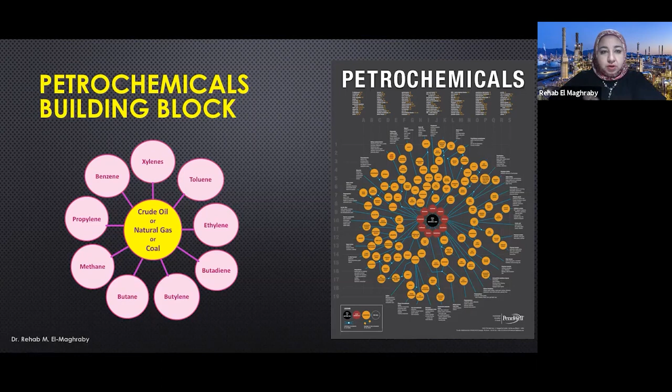So let's start first with natural gas. This will be the main focus - we will be talking about natural gas for 30 minutes or so, how to produce this natural gas, how to clean this natural gas, and reach the purity that is required for the petrochemical industry. Natural gas has two types: associated gas and non-associated gas.

Associated gas in the reservoir - you know that natural gas can be co-produced with crude oil. So a reservoir can contain crude oil and natural gas, and also there can be some reservoirs with only natural gas alone, which is the non-associated natural gas type. The main component in natural gas is methane, but there are other gases coming out with the methane, like ethane, propane, butane, up to C7 - we can say up to C7 will be heptane.

If this is non-associated gas - looking at natural gas, of course the composition differentiates with the change in the field. Not every field has the same composition of natural gas; there is different composition according to the field that is produced. Also, if this is non-associated gas, it is different than if it is associated gas.

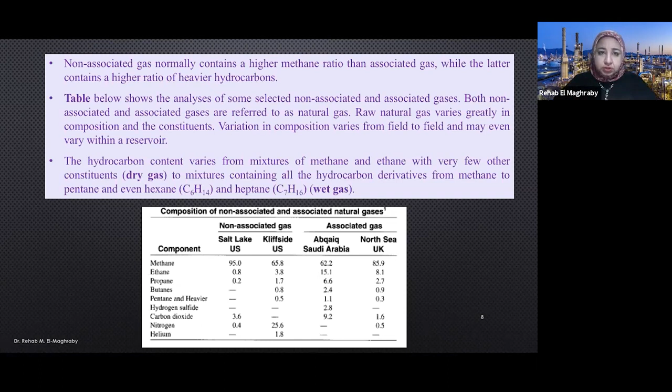As a general rule, the composition of natural gas is not constant. It differs from one field to another, and also depends on whether it is associated gas with crude oil production, which has higher molecular weight components, or non-associated gas, which has a higher composition of lighter components such as methane.

There are also other non-hydrocarbon components, like H2S (hydrogen sulfide) and carbon dioxide. We have nitrogen, helium, and sometimes mercury, which is not welcomed at all in natural gas, along with heavier components.

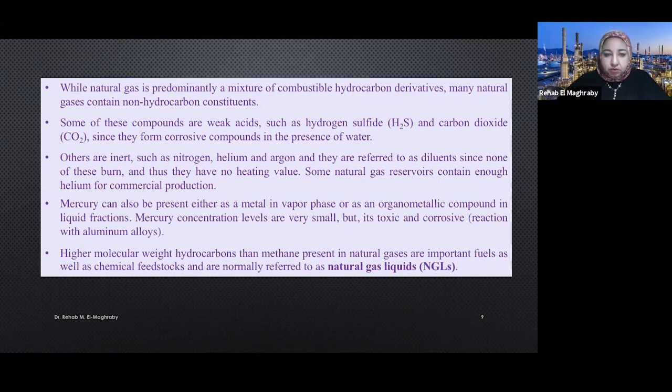The natural gas has to meet certain standards to be pumped, because it has to be cleaned. You don't want your pipeline to be damaged due to corrosion and pitting, hydrates, from hydrocarbon and non-hydrocarbon components.

Also, for the calorific value, you want to adjust the natural gas to be mainly methane, because nitrogen and carbon dioxide have zero calorific value.

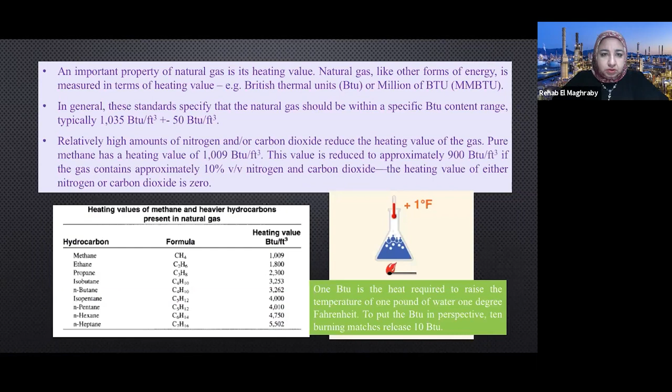So for the natural gas cleaning options: once you produce your natural gas, you first have to separate it from water using gravity. Then there is acid gas removal, dehydration (removal of water), mercury removal, nitrogen rejection (nitrogen removal), natural gas liquid recovery, fractionation, and sweetening. We will go step by step through the process of natural gas cleaning.

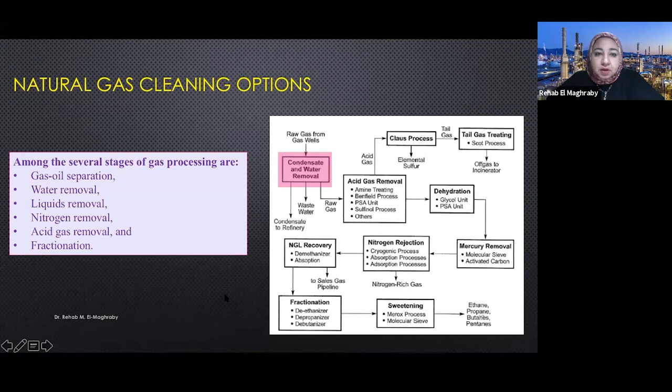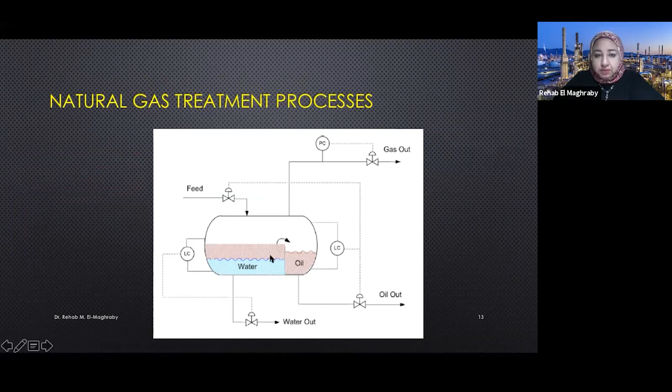The first step is to remove the water. If the gas is associated gas, you have oil, water, and gases, so this is a three-phase separator: you separate the water, and separate oil and gas from the top. If it is non-associated gas, there will be no oil, and this will be a two-phase separator, with only water and gas from the top. The next step after removing water using the difference in gravity is to remove acid gas.

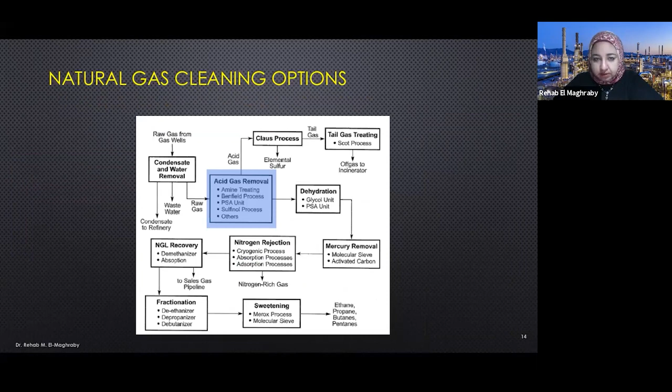In general, acid gas means H2S and carbon dioxide. In this case, we call this gas sour gas. Once you remove this acid gas, the natural gas becomes sweet gas.

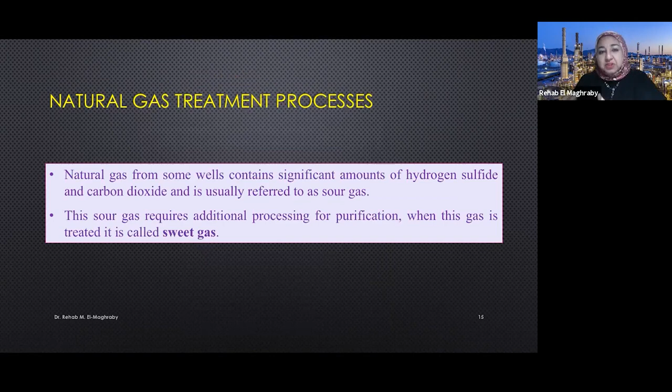So why do you want to separate the H2S? Because H2S mainly causes corrosion. Acid gas will react and cause degradation of your pipeline, and you don't want to damage your pipeline.

Also, H2S contains sulfur. If the natural gas enters the refinery or petrochemical plant containing H2S, it will damage your catalyst, so you don't want to have H2S in your natural gas.

Sulfur also reacts - if you burn this natural gas containing H2S, you will get SO2. The emission of SO2 will give you acid rain. So this is another reason why you want to remove H2S.

CO2 also is not welcomed at all in the natural gas. Why do we want to remove CO2 from the natural gas? CO2 causes corrosion, and it has zero calorific value, so it has no cost. It will actually reduce the selling price of your natural gas, because the selling price depends on the calorific value of the natural gas.

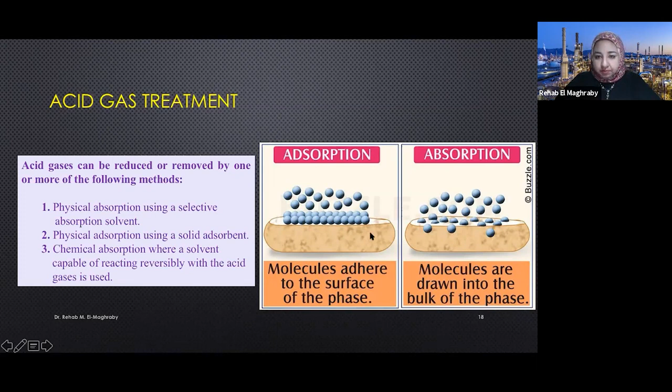So how is this acid gas removed? There are three known processes used to remove acid gas: physical absorption, physical adsorption, and chemical absorption. Absorption is where the gas is dissolved inside the liquid or solvent you have. In physical adsorption, you are using a solid material and the gas will be on the top. For acid gas treatment using physical absorption, there is no chemical reaction involved.

Physical absorption involves no chemical reaction. In this case, the solvent will be dimethyl ether of polyethylene glycol. This is one of the processes or solvents used for physical absorption, where no chemical reaction occurs between the acid gas and the solvent.

To illustrate this flow sheet quickly, if you are using a solvent, you have at least two towers: one is the absorber, the other is for regeneration, because you want to regenerate this solvent. So there's the absorber tower and the regeneration tower, with other serving facilities in between.

Your sour gas is introduced from the bottom of the absorber tower, where the solvent extracts all the sour gases from the natural gas. You inject sour gas and get sweet gas from the top, without H2S or CO2. The solvent is introduced from the top and flows in contact with the sour gas, so the gas is cleaned while the solvent becomes a rich solvent containing H2S and CO2.

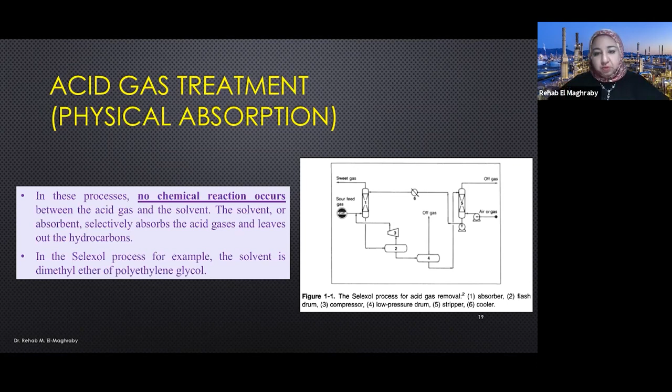The pores have a throat, like any rock structure. Zeolite is actually a natural material, though sometimes it's synthetic, depending on the type. The molecular sieve or zeolite contains pores with a certain throat size that allows only molecules of a certain size to pass through; larger molecules cannot enter the pore.

As the gas passes through, it contains H2S and CO2, which are smaller size molecules compared to methane. So CO2 and H2S will go inside these pores, while methane will not be able to enter and will pass through without being captured by the molecular sieve.

You introduce hot air for regeneration, to remove the CO2 and H2S. After a certain time, there will be no more capturing because the pores are filled with H2S and CO2, with no free space left. So you have to stop the process and do a regeneration cycle, using hot air or steam to heat up the molecular sieve so the air replaces the CO2 and H2S.

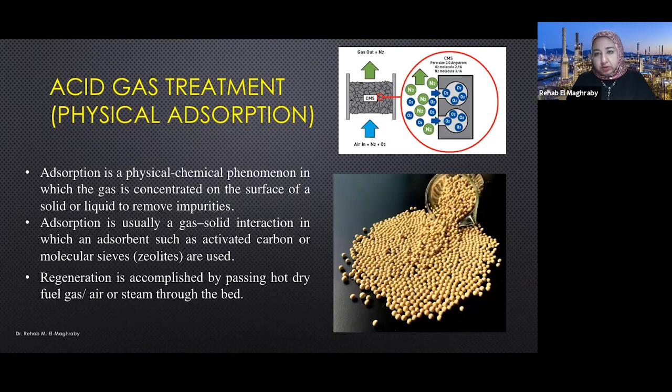So the third process is chemical absorption. This is actually the normal case used in many gas reservoirs or for surface facilities for natural gas.

So in this case, you have to remove CO2 and H2S using solvent. This solvent is amine based, like monoethanolamine, diethanolamine, diisopropanolamine, diglycolamine. So it is actually based on amine solution.

This amine solution undergoes chemical reaction. The amine reacts with H2S and forms sulfide, and for the CO2 it forms carbonates. This bond is easy to break. So for the choice of your solvent, it has to carry on reaction with the CO2 and H2S, but this bond between the sulfur and the amine could be easily broken, so we can regenerate the solvent again and use it again.

We don't want to waste your solvent, because if the reaction is permanent, as we will see in NaOH. If you are using caustic soda or NaOH, the reaction will be permanent, so you have to use fresh solvent each time. This will not be economic. So when you choose your solvent, you have to choose one that can be easily regenerated and used back again in the process. This is the process of chemical absorption.

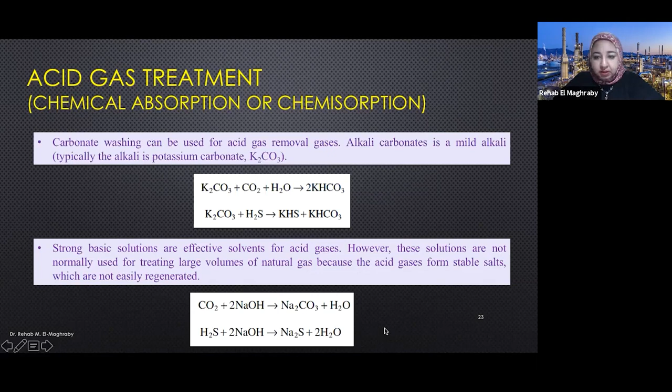Caustic soda or NaOH also reacts with CO2 and H2S and could be used, but it is a permanent reaction. The carbonate and sulfide of the sodium is permanent, non-reversible, so it is not easily regenerated. You are wasting the NaOH, so it is not recommended to use.

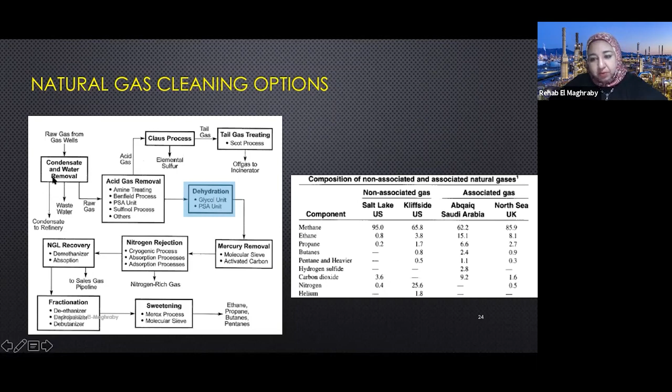So now we have our natural gas free from acid gas. The next step is to conduct dehydration, which means we have to remove the water from the natural gas. Why would we like to remove water from natural gas? Didn't we already remove it here? No, because that was just using gravitational force to separate water from gas. In this case, we want to reach a part per million concentration of water, which is not achievable by this way of separation. So we conduct dehydration.

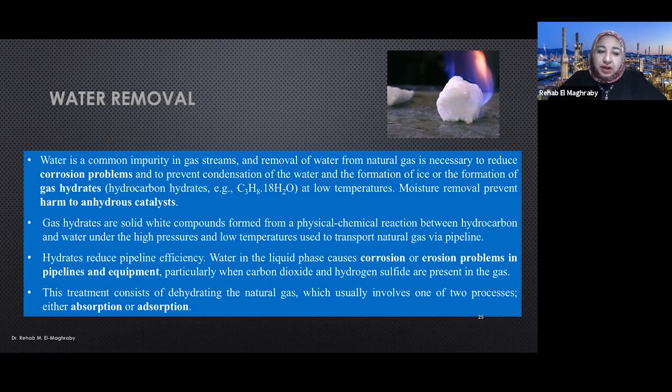So for this flow sheet, this is a flow sheet of extraction of water from the natural gas using glycol.

For solvent extraction, we have two towers: absorption tower and regeneration tower. In the absorption tower, wet gas containing water is introduced from the bottom, and after meeting with the glycol, the glycol extracts the water from the natural gas, giving us dry gas. The introduced glycol is lean at the top, and after extraction of water, it becomes rich glycol, which is then introduced to the regeneration tower.

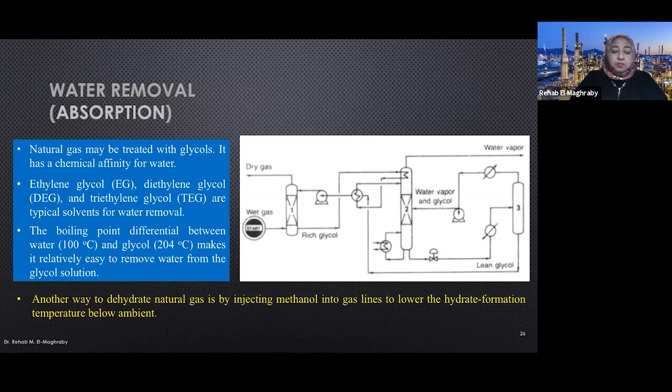For adsorption, we are using solid molecular sieve. The water molecule is small enough to fit inside the pores of this molecular sieve. The molecular sieve contains pores, and if we look at the sizes, methane is larger, N2 and O2 are smaller, and H2O is smaller.

So H2O can go inside the throat of the molecular sieve and be captured inside, along with CO2 and H2S. The methane cannot go inside the molecular sieve, and it will go from the top of the tower or from the bottom, whatever way you are injecting the gas.

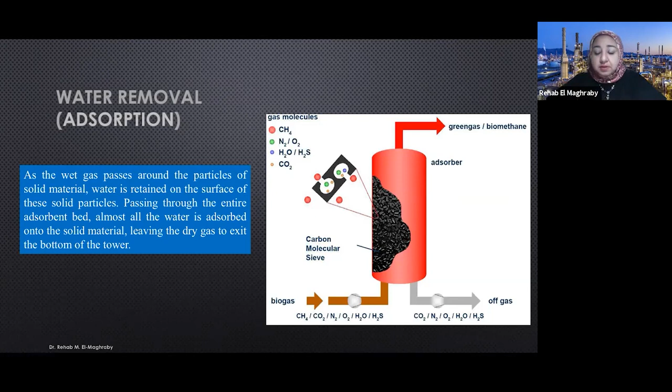So back again here, this is the flow sheet of adsorption using molecular sieve, so we can extract water from the gas. You can see here that there are...

Two extraction towers. They work alternatively. So once one is filled with H2O or water, it will be closed and the other one will be used. So one is in the regeneration phase while the other is in the adsorption phase.

Let's follow the blue line here. We have the wet gas introduced to the molecular sieve, introduced from the top in this case. The H2O is captured inside the molecular sieve, and the dry gas comes from the bottom.

After it is filled with H2O, no more H2O can go inside the molecular sieve since the pores are filled with water. It will be closed, and we will start the regeneration step, which in this case is the red line.

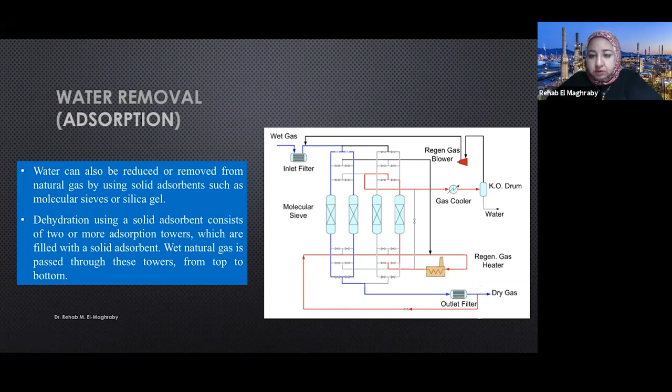So let's see, we take some dry gas here, it is heated, then introduced to the molecular sieve or the adsorption tower, and it comes out as water and dry gas from the top. You have to separate the water in this tower, and the dry gas is compressed and injected again with the wet gas.

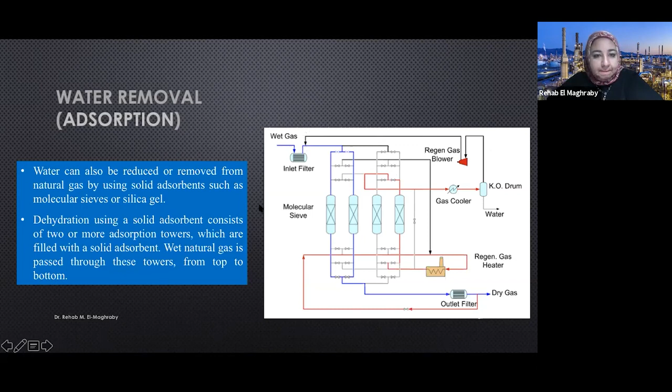The other step here: after we separate the gas from the water, after acid gas removal, after dehydration, we've dried our gas, we have to remove the mercury if the concentration of mercury is high.

We can do mercury removal using molecular sieve or activated carbon. Mercury actually causes corrosion to the brazed aluminum heat exchanger, which can cause environmental and safety hazards, so it's not allowed. Mercury also causes catalyst poisoning, so mercury is not welcomed as a material or component in natural gas. Two methods can be used to remove the mercury: non-regenerative mercury sorption or regenerative mercury adsorption.

For the non-regenerative method, you expect the material to be damaged. You cannot use material that will be damaged again; it cannot be regenerated.

For regenerative mercury removal, you use a molecular sieve which can be regenerated back using hot gas. I will not go into more detail on mercury removal, but you have to know that mercury can be removed using two methods: non-regenerative mercury sorbent, where the sorbent will be damaged forever and the surface cannot be regenerated or used again.

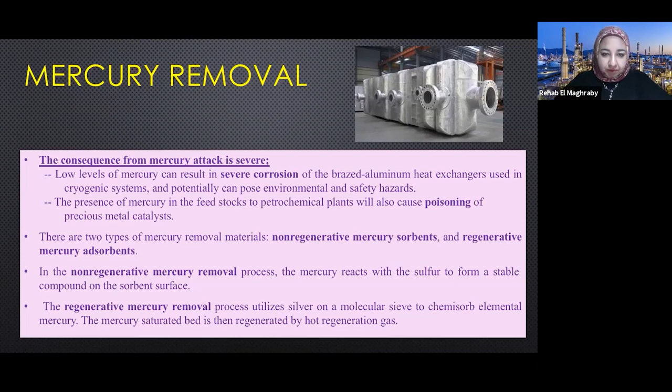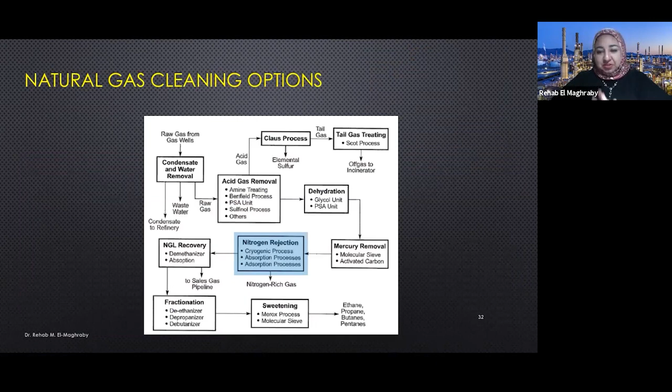For the next step, after we remove the mercury, we have to clean this natural gas from the nitrogen. If it contains nitrogen, nitrogen has zero calorific value. If you have a huge amount of nitrogen, or the composition of nitrogen in your natural gas is high, it will reduce the calorific value of your methane or natural gas, so it will affect the selling price of this natural gas.

Also, if nitrogen is contained in the natural gas, at the end you can have NOx, which is not environmentally friendly and can affect the ozone layer. So we have to separate nitrogen.

Nitrogen can be separated using two ways: cryogenic process and pressure swing adsorption. The cryogenic process uses the difference in boiling point between methane and nitrogen. Methane has a boiling point of minus 161, and nitrogen is minus 195.

Using very low temperature and high pressure, we will find that the methane will be liquefied and the nitrogen will be in the gas phase. So you can separate the nitrogen from the methane using the cryogenic process.

In pressure swing adsorption, it's like a molecular sieve. You will end up having nitrogen captured inside the pores of this molecular sieve, while the methane is not captured. So the nitrogen can be separated from the methane this way.

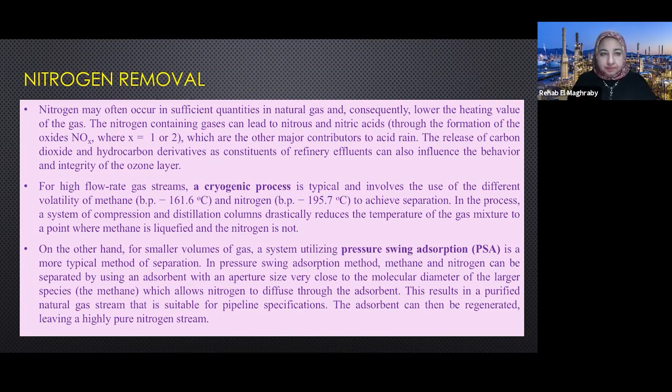This is about nitrogen removal. Again, the process you use depends on whether the natural gas has nitrogen inside; if not, you don't have to do the nitrogen removal step. So the natural gas cleaning options are according to the composition of the natural gas. If the natural gas contains no mercury, you don't have to remove mercury or use that step.

The next step is to separate the methane from the other natural gas liquids. Methane is what we mean when we say natural gas, like the natural gas used in the stove for cooking or in a furnace in industry. When you say natural gas, you mean methane, so you have to separate the methane from the other gases.

It is important, because the other gases are important for the petrochemical industry: ethane, propane, butane. Methane is also important for the petrochemical industry itself; from methane it can be converted to syngas, methanol, formaldehyde, and so on.

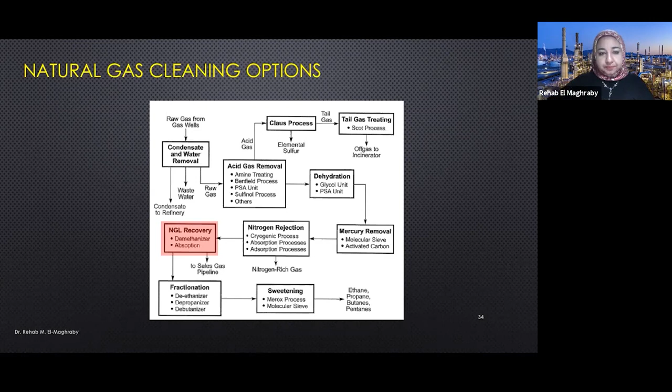So in this step, you have to separate the methane from the natural gas liquid; this is called the demethanizer. How can we separate this methane from the natural gas liquid? Using the absorption method or the cryogenic expander process.

So what you have is a gas under pressure, and then you allow this gas to expand without losing heat to the surrounding. This is called cryogenic expansion. What you will end up with is that the temperature of this gas will be reduced. This principle is used in what's called adiabatic expansion, and we use this process to reduce the temperature of the natural gas.

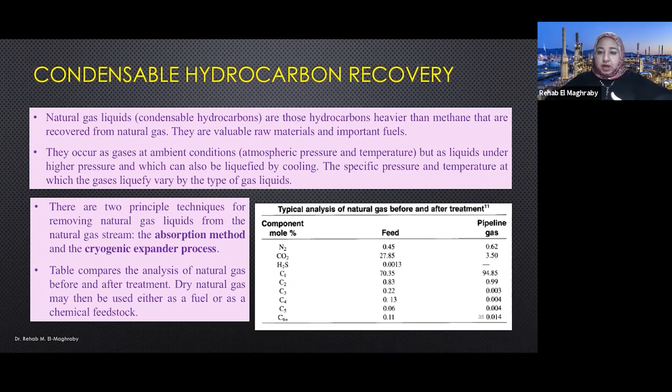Once you reduce the temperature, the natural gas liquid will be in the liquid state, and the methane will be in the gas phase. So we can separate them from each other.

Of course, we don't want to have water in this case. If you have water with the natural gas, it will form hydrates, and we don't want this hydrate in this process.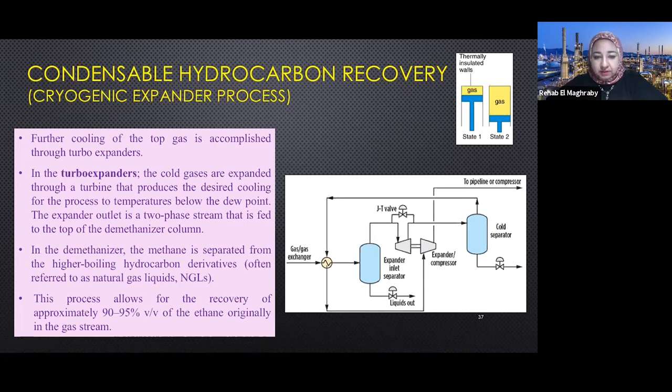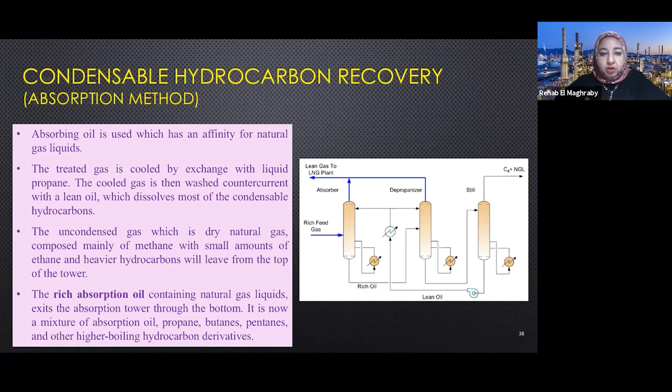From the top of the absorption tower, we have the natural gas, which is mainly methane, with a slightly small amount of natural gas liquid.

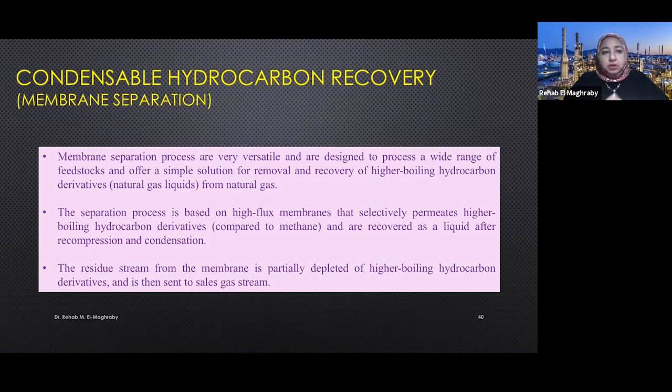There's also membrane separation. You can separate methane from natural gas liquid using a membrane. This membrane separation technology is actually used in Egypt to separate acid gas such as CO2 from natural gas. I didn't discuss it in the acid gas separation section, but membrane separation is one of the methods that can be used to remove acid gas, and it can also be used to remove methane from the natural gas liquid.

After you separate the methane from the natural gas liquid, you compress this methane and transport it globally. It has to be liquefied - liquefied natural gas (LNG). So it is methane compressed and cooled at very low temperature and high pressure, and transported using trucks and ships especially equipped for liquefied natural gas transportation.

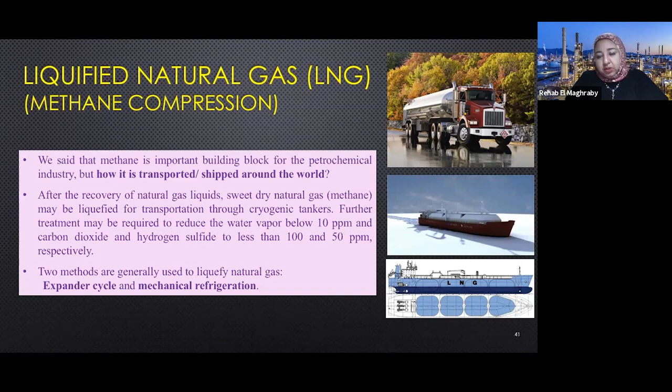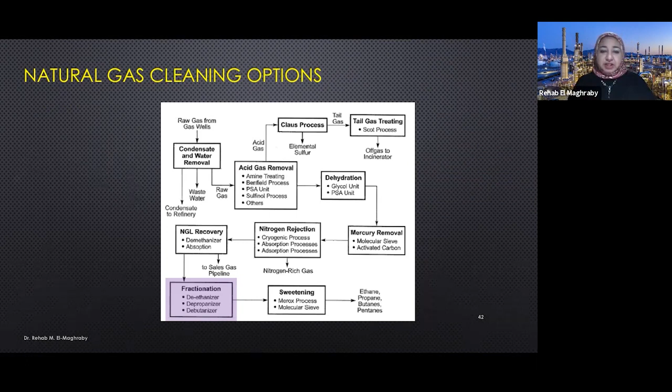So we have separated the methane. We have natural gas liquid together, which is ethane, propane, butane, and pentane. We have to separate these from each other. Each one of these is valuable for the petrochemical industry, but combined it is not valuable. So you have to separate this fraction, or natural gas liquid, from each other using the fractionation process.

So the first step, the gas here, according to the flow - let's discuss the flow sheet directly. The gas here is introduced, containing ethane, propane, butane, and pentane plus, meaning C5 and higher components. This gas is methane-free, doesn't contain any methane.

From the first fractionation tower, called the de-ethanizer, ethane is separated from the top, and the rest of the natural gas liquid is introduced to the next fractionation tower. Now free from ethane, it's introduced to the depropanizer. Propane is produced from the top, and the other components, C4 and C5 plus, are produced from the bottom. Then it enters another fractionation tower where butane is separated from C5 plus.

C5 plus, in most cases, is called natural gasoline. This is also important for the petrochemical industry, so natural gasoline is produced from the bottom.

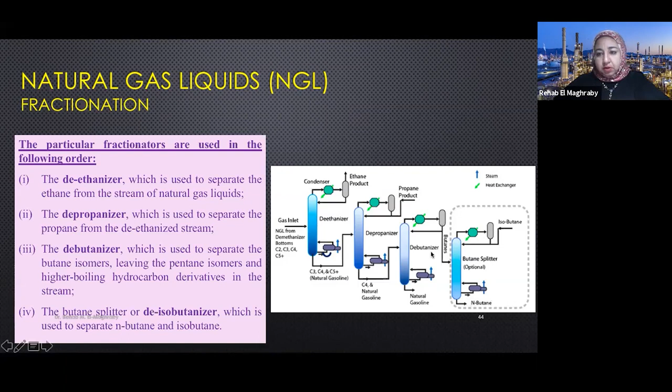For the C4, we have two C4 components - we don't have isopropane, but the first isomers we have are normal butane and isobutane. So the butane mixture is introduced to a butane splitter, separating isobutane and normal butane. It depends on the composition of iso and normal butane whether you will use a butane splitter.

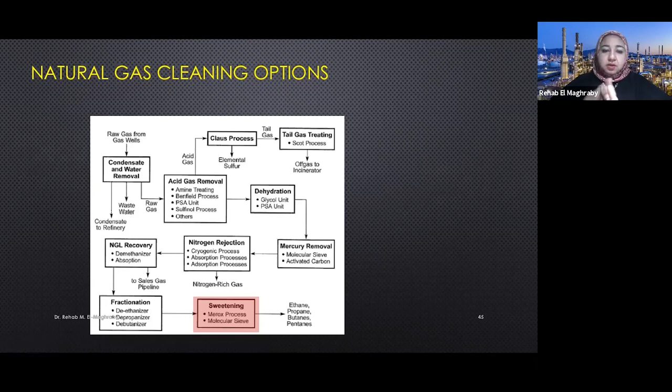The last step for natural gas cleaning is the sweetening. You have to clean your natural gas from mercaptan. We use ammonia or NaOH in this case. The ammonia and NaOH will react with mercaptan, which is RSH. The caustic solution will react with mercaptan and produce disulfides. The disulfides are insoluble.

Sometimes a catalyst is used with NaOH or ammonia, and it is called the Merox process. If the concentration of mercaptan in your natural gas is high, you have to do the Merox process, or mercaptan removal process. In this case, the H2S-free phase only contains mercaptan.

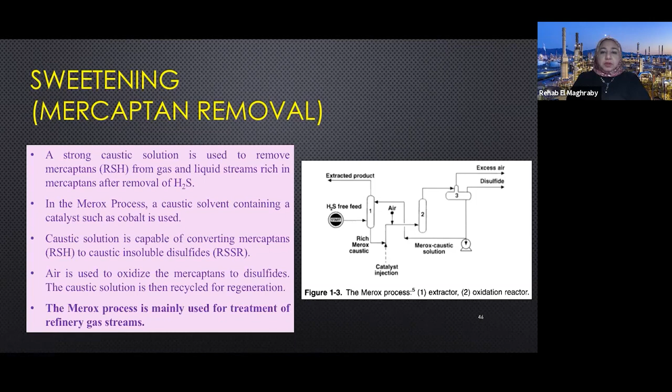Elemental sulfur can be used in many applications, like battery manufacturing, electrodes, and in the petrochemical industry for rubber production and so on.

Now we have methane as a product, and then ethane separately, propane separately, butane separately, and pentane as a separate process. All these natural gas components are valuable in the petrochemical industry.

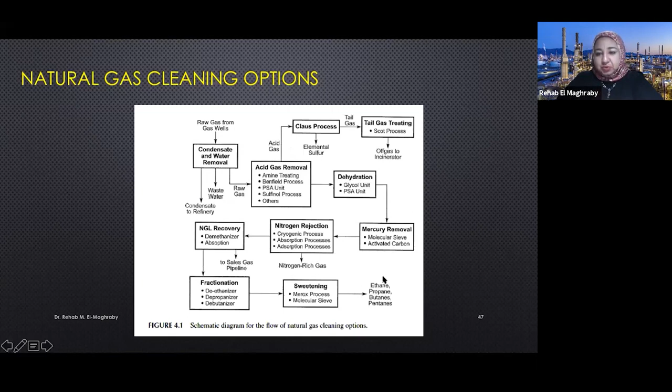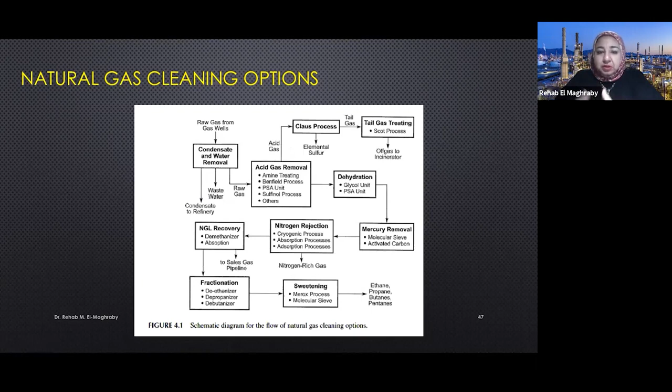In the latest lecture, we will see what chemicals can be produced from each of these components, why these components are valuable, and what petrochemical materials can be produced using this building block, or using these raw materials.

The other gas source is the refinery gas. We also have the crude oil as a source. So we have refinery gas as a source for petrochemicals, and we have crude oil as a source of petrochemical-based material.

We also have ethane produced, and ethylene, propylene produced from the refinery in catalytic cracking, which is also important for the petrochemical industry.

We have naphtha, or the gas oil—sorry, gasoline, naphtha. If you know, it's commonly known; this is the benzene you put in your car, not the benzene ring. It's commonly known in Egypt as benzene.

So the gasoline is actually an important feedstock for the petrochemical industry, because gasoline is a source for olefins if you are using steam cracking. The gasoline can be steam cracked to olefins, and benzene, toluene, xylene, which are important building blocks for the petrochemical industry. Gas oil can also be used as a feedstock.

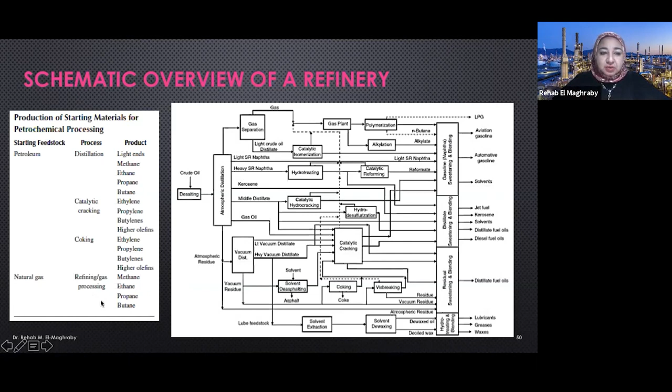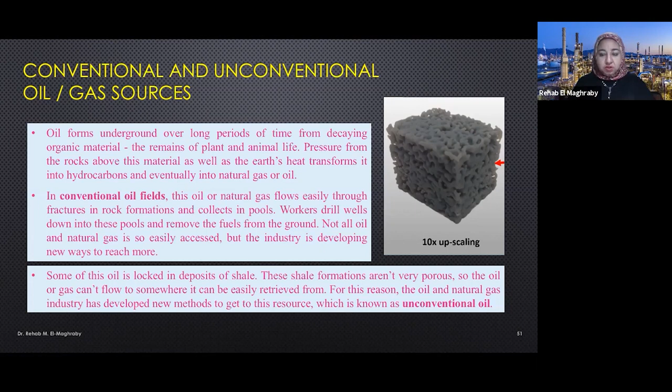But actually there is unconventional oil, which means there are two types. For unconventional, the core itself has pores, but these pores are not connected together, so the crude oil doesn't migrate and it forms kerogen, and we will see how this is produced. So for the oil source, we have oil shale, the first oil source that has potential to be used for the petrochemical industry.

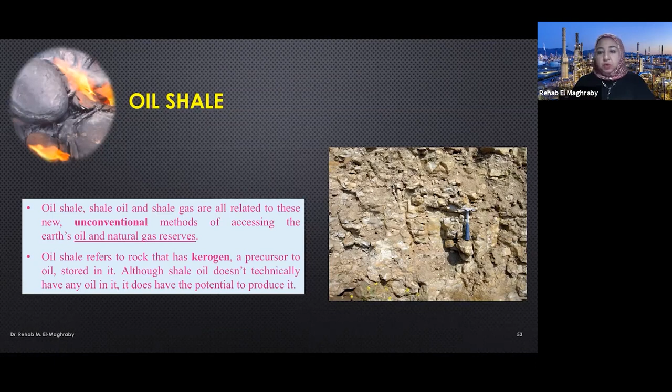So the oil shale, in this case, it is believed that the oil does not migrate, and it is the source rock. The form of oil is called kerogen. Kerogen is believed to be the precursor of crude oil. So this is the shape of kerogen.

If the kerogen is applied at high temperature, without the presence of oxygen, it will be converted to crude oil. So this kerogen actually exists in oil shale, and you have to produce this kerogen from the oil shale.

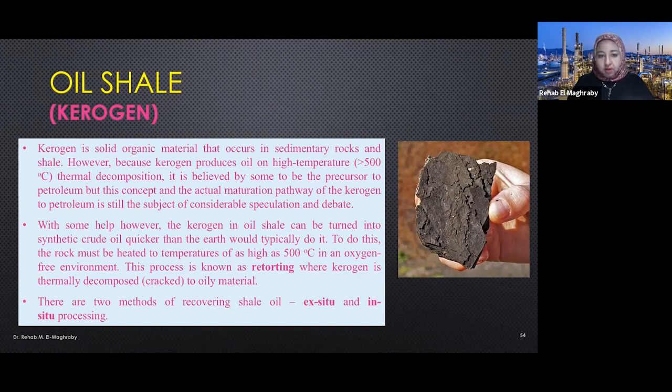We have the ex situ or in situ processing. In the ex situ process, you have to mine this, like normal mining or surface mining of this kerogen type, this oil shale, and then take these shales and apply pressure and high temperature, 150 to 500 degrees, in the absence of oxygen, and force this kerogen to be converted to crude oil. Then this crude oil is processed with normal crude oil for production of fuel or other fractions.

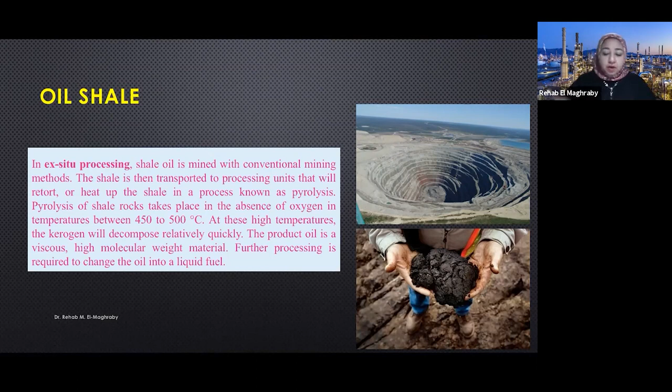The other process is in situ, where this kerogen has to be converted to crude oil. It cannot be produced just as kerogen, pumped up directly. No, you have to convert this kerogen in situ. This is the other method.

At around 345 to 370 degrees Celsius, by heating the formation. To heat this formation, you can use electrodes, thermal heating, or electricity. You bury electrodes and conduct electricity to heat up the formation and force this kerogen to be converted to crude oil. It is believed that the reserves for this oil shale are about 3 trillion barrels, so it is a huge reserve, but the production is very expensive and still in a very early stage.

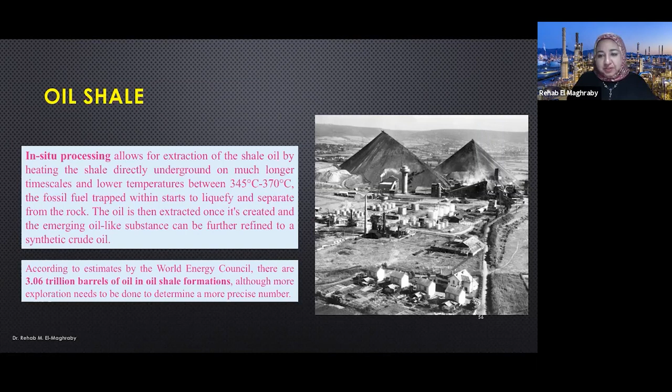The other source here is shale oil. There is a huge development in shale oil and shale gas in the USA, and actually it made shale gas bring a recovery for the USA in the gas market. So if you compare gas production in the Middle East and USA, you will find the USA a competitor in natural gas production because of shale gas. Natural gas production and gases itself are important for the petrochemical industry.

So the shale oil is different. It is called tight oil because it is crude oil, normal crude oil. It is not in the source rock, it is in the reservoir, actually after migration.

It is believed that kerogen is a precursor to crude oil, but there is some debate on this. If we say the kerogen is converted in the source rock to crude oil, and this crude oil migrates to the production reservoir, then in the case of shale oil, this reservoir has very tight pores, not connected pores, very small and not connected together, making it hard to produce using normal ways. So what happens is they create hydraulic fracturing of this shale oil or tight oil to produce it.

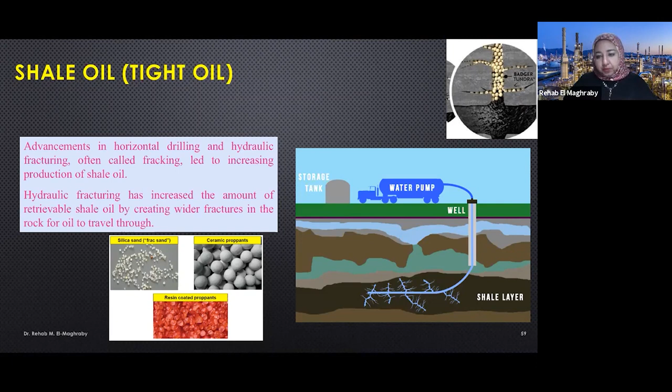There is an increase in production for this type of shale oil. It is a normal crude oil, so actually it can be refined and so on.

Shale gas, let's talk about shale gas. It is the same as shale oil, but instead of crude oil, there is gas present. It is the normal reservoir, but it is tight, the pores not connected together. So this gas cannot normally flow unless you create fracturing.

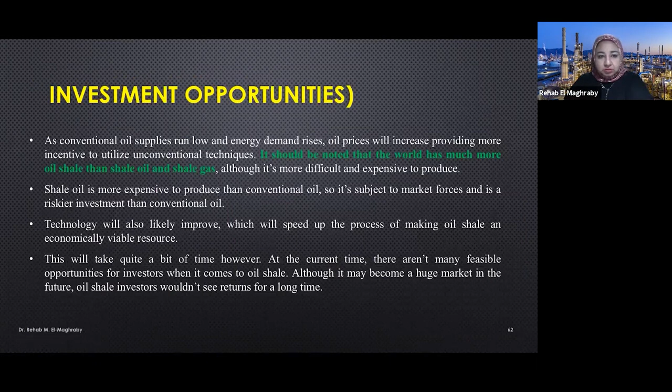The oil source discussion will continue. We talked about crude oil, briefly about oil shale and shale oil. Different things: we talked about oil shale as a potential source, but that is in the future. Shale oil is an actual way of producing oil, happening now in the USA. Tar sand is mainly in Canada, and to some extent in the USA. Tar sand is a type of crude oil, but it is very heavy.

Crude oil contains gases: methane, ethane, propane, butane, and also pentane, hexane, heptane, and so on. So the material has a vast range of boiling points. But one component is bitumen, very heavy, which has a boiling point higher than 350 degrees. Tar sand is mainly bitumen, which has a boiling point higher than 350 degrees Celsius.

It has a very high pour point, so at normal temperature it will be solid. To produce this, you have to heat it up to reduce the effective viscosity of this heavy material so it can flow normally.

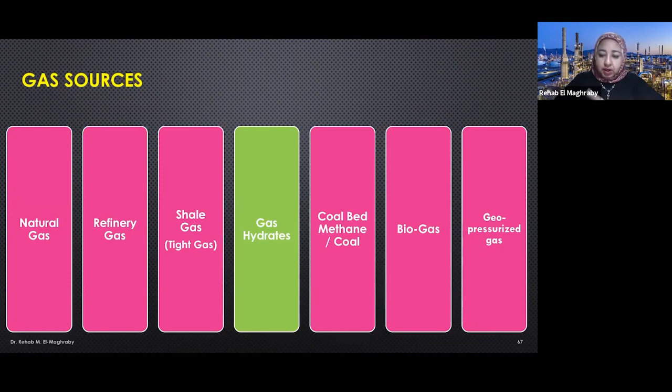So we finished the crude oil sources or fuel sources. Now we will go back to the gas sources. We have gas hydrate. Gas hydrate is actually a source of methane. You can find gas hydrate at the border or margin of continental shelves, and also in cold areas like Siberia.

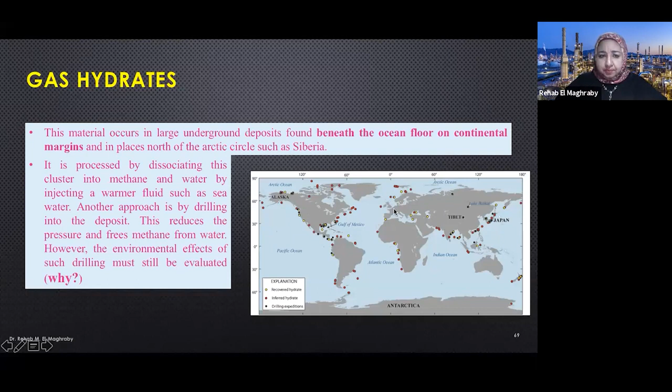So if we compare the composition of the gas hydrate, it cannot be only methane. It can be propane hydrates and pentane hydrates, but it's normally known as methane hydrates. Actually, it contains some other components.

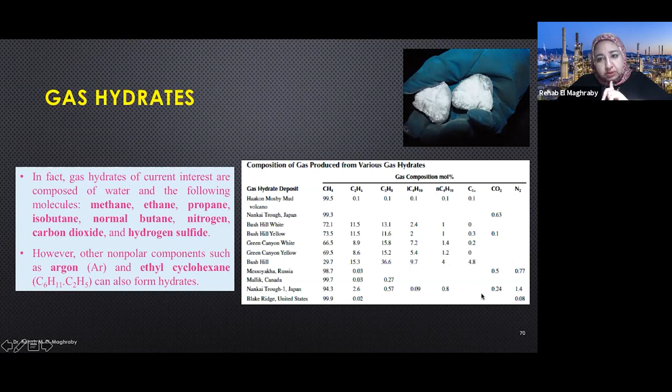As you can see from this table, we have different gas hydrate deposits, and we have the composition of each: methane, ethane, propane, normal butane, isobutane, C5 plus, CO2, and nitrogen. We can see there is a difference in the composition according to the place of production of this hydrate. Some hydrate is 99% methane, and others can be as low as 29% methane, with the rest ethane, propane, and butane. Some of these also have CO2 and nitrogen inside.

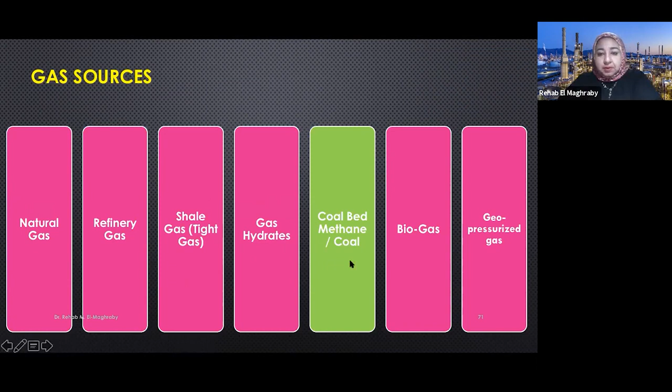So the other type is coal bed methane. Gas hydrate was a source of methane, ethane and propane, all important building blocks for the petrochemical industry. Coal bed methane, from the name, contains mainly methane with a slightly small amount of higher molecular weight compounds like ethane, propane, and butane, but it is mainly methane. It contains impurities with it, oxygen and sulfur compounds, and water as well. So you can see that this is the coal bed.

Coal bed methane, as I told you, this is a way to produce it. It's produced using fracturing and other techniques. So you inject using horizontal drilling, and then you use fracturing to facilitate the production of methane from this coal pit.

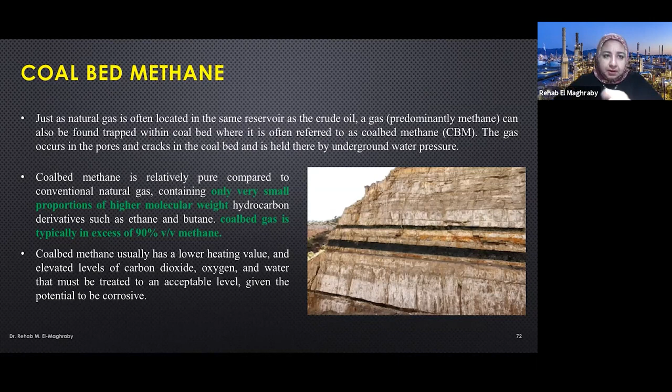The coal itself is an important raw material for the petrochemical industry and for energy production. It's of huge reserve in North America, Europe, and China, and the reserves of coal are expected to continue after the crude oil and natural gas are used up.

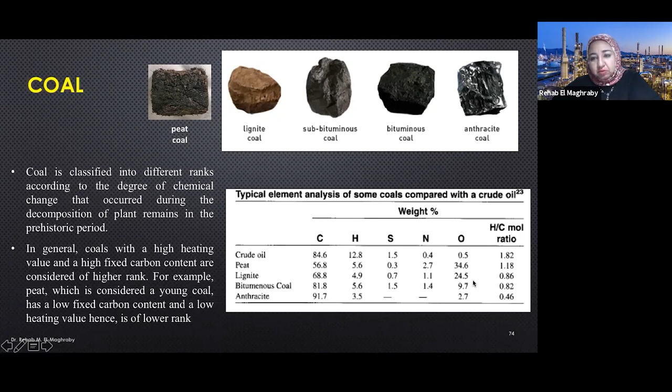Coal can be converted to three phases: gas, liquid, and solid, which is called coal carbonization. Coal carbonization heats up the coal at a very high temperature in the absence of oxygen or air. This converts the coal to coke, which is a very important solid material for iron production, battery production, and so on.

The other byproducts from coal carbonization are gases, mainly methane but with a very bad smell because you expect sulfur to be present, and coal tar, which is a very viscous liquid that can be used in shampoo, anti-dandruff products, photography, and dyeing, among many other uses.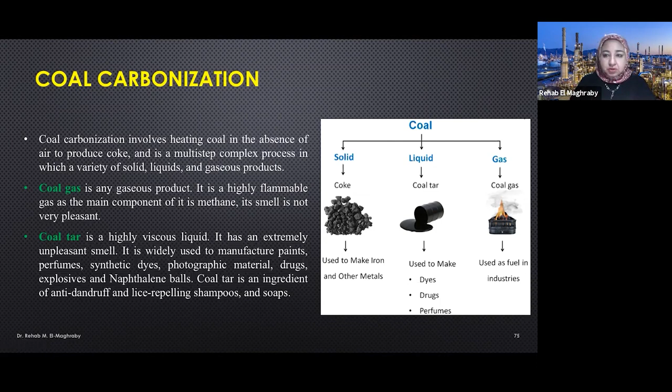Coal gas is mainly methane, so it can be used as a methane source. Coal gasification is one of the important steps in the petrochemical industry, and it is being used in China because China doesn't have high reserves of gas, very low reserves, but has a very huge amount of coal.

So they are trying to use technologies like coal to oil, methanol to olefins (MTO), and also coal to olefins, which means converting coal to syngas and syngas to olefin. This is called coal gasification. So here carbon reacts with water, which is called gasification with steam.

You will have coal syngas and hydrogen - carbon monoxide and hydrogen. Syngas means a combination of carbon monoxide and hydrogen. Another way is to use steam and carbon monoxide to produce hydrogen, so you can use coal as a source to produce hydrogen too. But the composition of hydrogen in coal is very small compared to the amount of hydrogen that can be produced from methane. For methane, it's 1 carbon compared to 4 hydrogens, while in coal it's a very low amount of hydrogen. So coal is not a source of hydrogen, it's a source of syngas - CO and hydrogen.

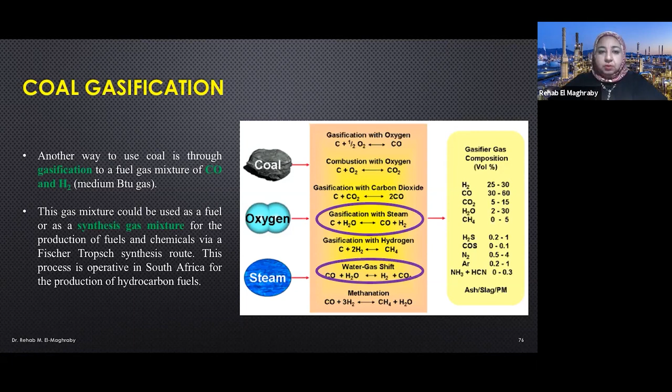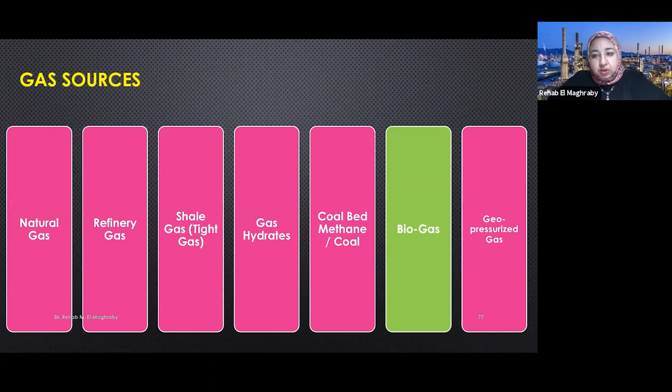The last two gas sources we are going to talk about are biogas and geo-pressurized gases. For biogases, it's the biodegradation, anaerobic degradation of biodegradable materials, organic components, sewage, and any biological waste-based waste. You can use different sources to convert these wastes to biogas.

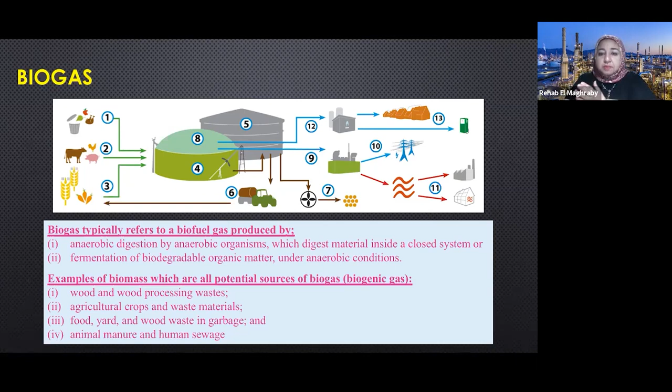The biogas composition is different from one source to another. Source one is waste from domestic homes, source two is sludge from wastewater treatment, and source three is agriculture waste. If we see the composition of this biogas, it is mainly methane, from 50 to 60%, up to 60 to 75 percent methane.

It also has CO2, H2S inside, nitrogen, water, hydrogen sulfide, and sometimes ammonia. Biogas is a source of methane, and it can be used as a green natural gas or renewable natural gas.

Although methane by itself is damaging to our environment - the effect of methane leaking to the atmosphere is in the range of 26 times the effect of a molecule of CO2 in terms of global warming - in the case of biogas, it is a renewable natural gas which is mainly methane.

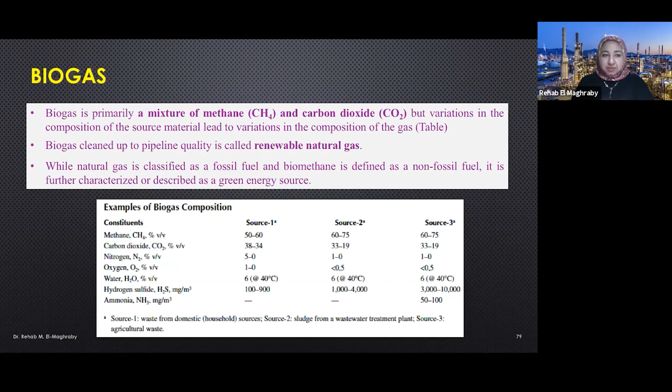Geo-pressurized gases: geothermal energy is starting to get more attention. These reservoirs, 3 kilometers to 7.6 kilometers down, contain a very huge amount of heat. These fluids inside can contain natural gases and other gases dissolved in them, and can be used by itself as a gas produced from the dissolved gases, or used for heating or for the generation of steam.

It is getting potential attention now. I've seen that Americans are closing the petroleum engineering specialty, and I think the geological specialty too, converting to more non-conventional sources of underground reservoirs. One of these is the geothermal reservoirs.

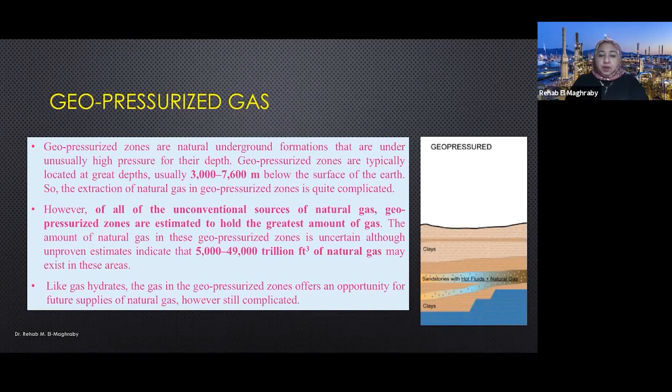At the end, we can say that there is a vast majority of gas sources and oil sources that can be used as a potential for the petrochemical industry through non-conventional ways. The conventional ways can also be used for the petrochemical industry and for refineries. If one of these sources is used up, there are other sources, and I don't expect this petrochemical industry to vanish in the near future. It will last for a very good amount of time.

Okay, so thank you. I hope that you enjoyed this lecture, and I hope that I made things simpler for you. Thank you.